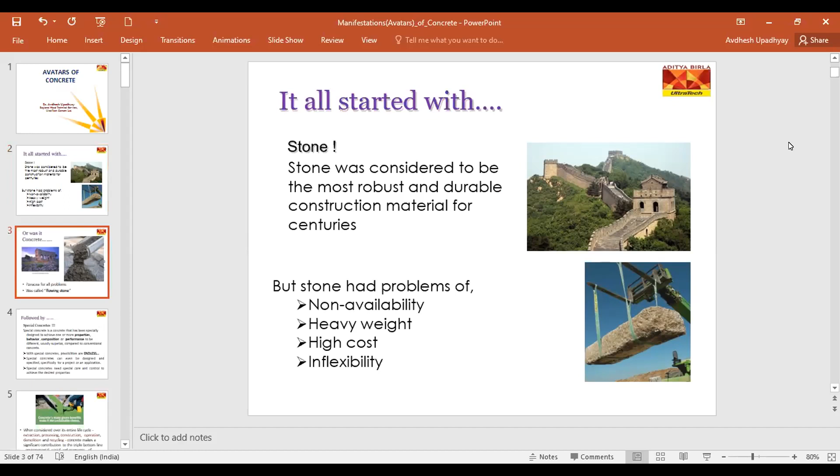So what is the panacea for all these problems? Panacea means answer to all the problems, or solution to all the problems. So the panacea for all these problems was flowing stone, and flowing stone is nothing but our concrete. So the answer to all this problem is concrete.

Today I am not discussing standard concrete or normal concrete, but I am going to discuss with you special concretes. Now the question arises, what is special concrete? Special concrete is a concrete specially designed to achieve one or more properties, behavior, composition, or performance that is different and usually superior compared to our conventional concrete or standard concrete.

And the possibilities with special concretes are endless. Nowadays, concrete is just like a menu or recipe. If somebody wants to eat Chinese, continental, or Indian, they can order accordingly. So if somebody wants special concrete like high performance concrete, high strength concrete, self-compacting concrete, or whatever, they can order as per their requirements. But special concrete can even be designed and specified project specific.

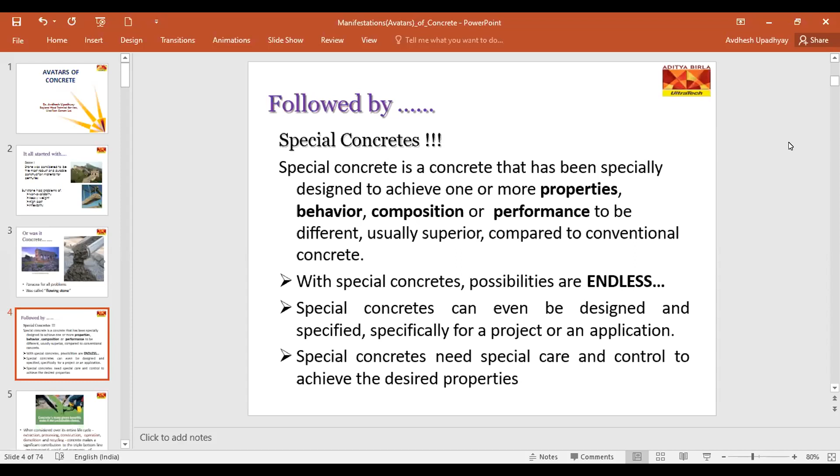Concrete's many green benefits make it a sustainable choice, when considered over its entire life cycle, starting from extraction, processing, construction, operation, demolition, and recycling. Concrete makes a significant contribution to the triple bottom line, like environment, social, and economy of sustainable development. How concrete is green, or how concrete is a sustainable material, I will explain in my next slide.

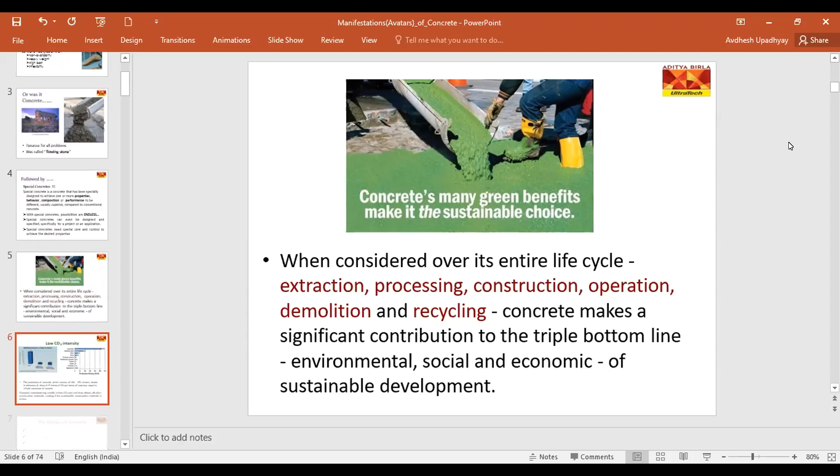If you look at this bar graph, it shows that if you produce 1 ton of aluminium, production energy required is 270 gigajoules. If you produce stainless steel, production energy required is 90 gigajoules. For steel, it's 30 gigajoules. For glass, it's 20 gigajoules. And for Portland cement, it requires 5 gigajoules per ton, whereas reinforced concrete requires only 2.5 gigajoules per ton. So concrete manufacturing results in less CO2 per unit than almost all construction materials, making it the sustainable construction material of choice. So concrete is a greener, more sustainable material compared to other construction materials.

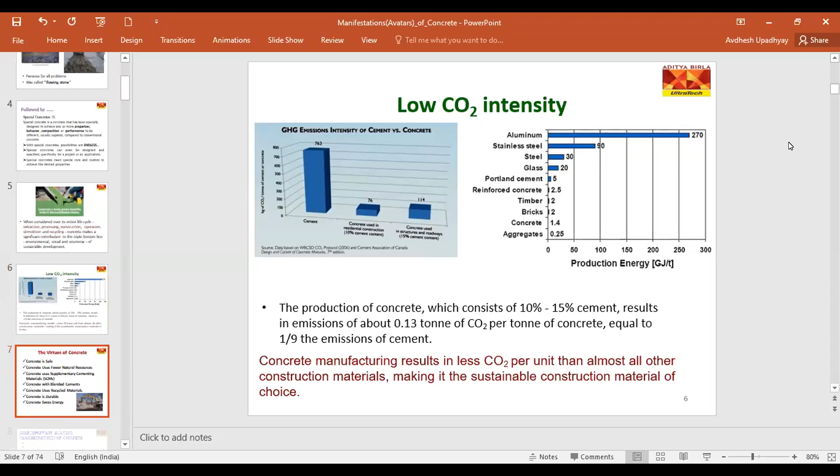So what are the benefits of concrete? Yes, concrete is safe. Concrete uses fewer natural resources. Concrete uses blended cement. Concrete uses recycled material. Concrete uses plastic waste. Concrete uses rubber waste. Concrete is durable. Concrete saves energy, and concrete saves time also.

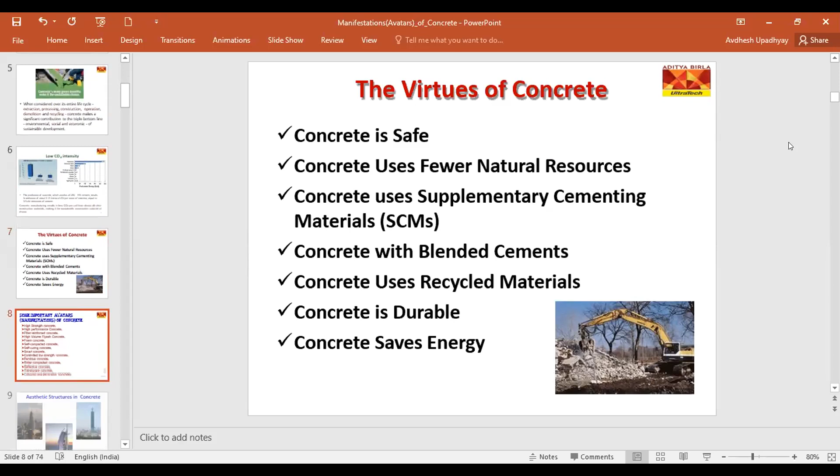So these are some avatars or manifestations of concrete: high strength concrete, high performance concrete, fiber reinforced concrete, high volume fly ash concrete, foam concrete, self-compacting concrete, self-curing concrete, smart concrete, controlled low strength concrete, pervious concrete, roller compacted concrete, reflective concrete, translucent concrete, colored concrete, and decorative concrete. I will discuss a few of them in my next slides.

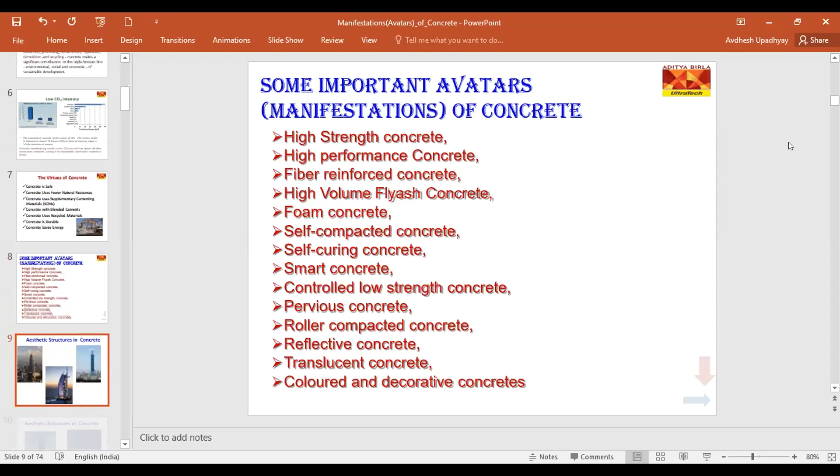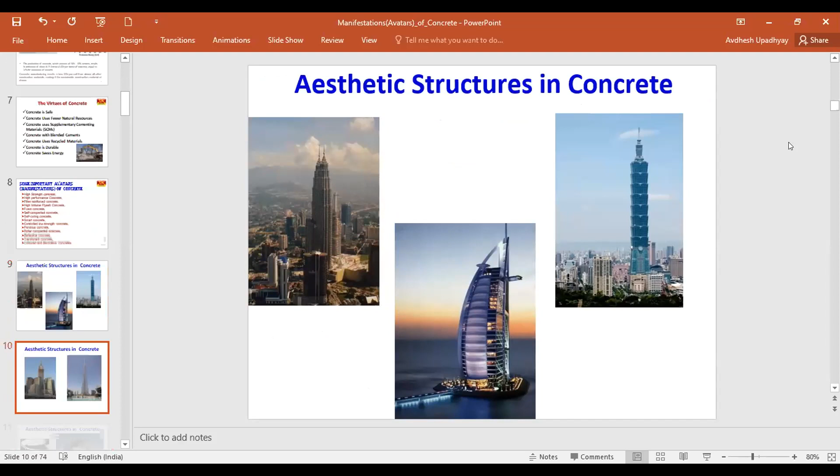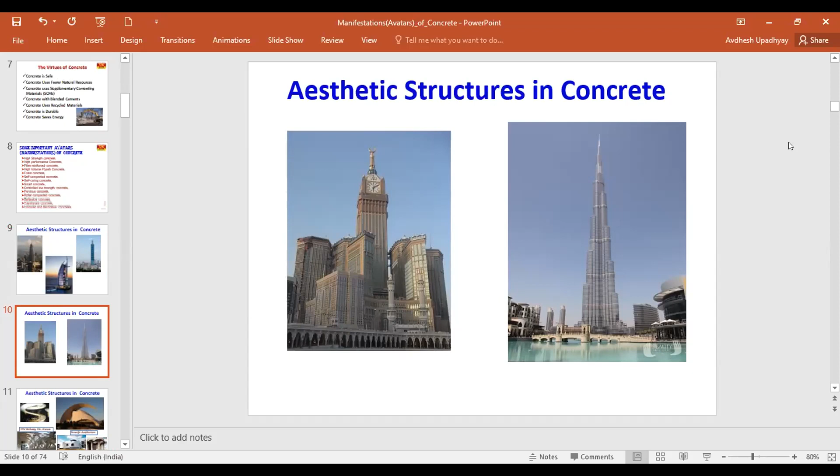This type of structure is possible only with concrete. Without concrete, construction of such type of structure is not possible. If you look at this aesthetic structure in concrete, these are a few aesthetic structures in concrete. This type of structure construction is possible in concrete because of its flexibility, durability, and moldability.

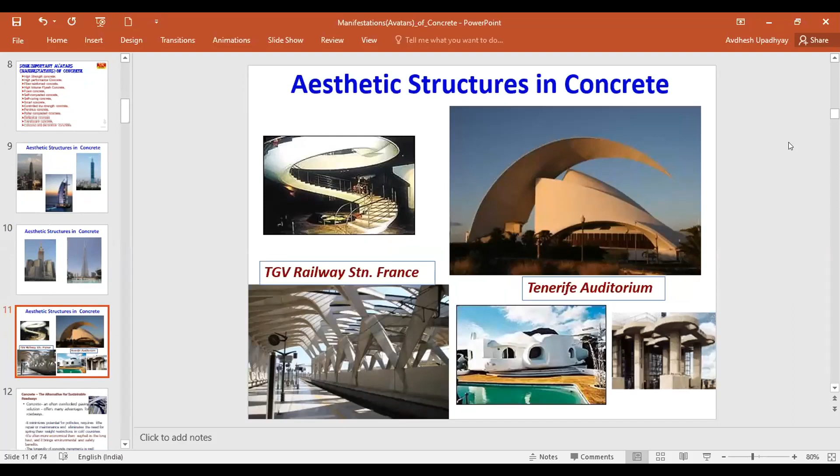Concrete is not only used in residential or commercial buildings, but it offers many advantages for roadways because it minimizes the potential for potholes, requires little maintenance, and eliminates the need for spring thaw weight restrictions in cold countries. This is not applicable in our country, but it offers more economy than asphalt in the long haul, and it brings environmental and safety benefits.

The longevity of concrete pavement is well documented. If you look at Marine Drive roads, built around 1916, then Grand Trunk Road, then Nagpur Road, all are concrete roads. They are also well documented and durable.

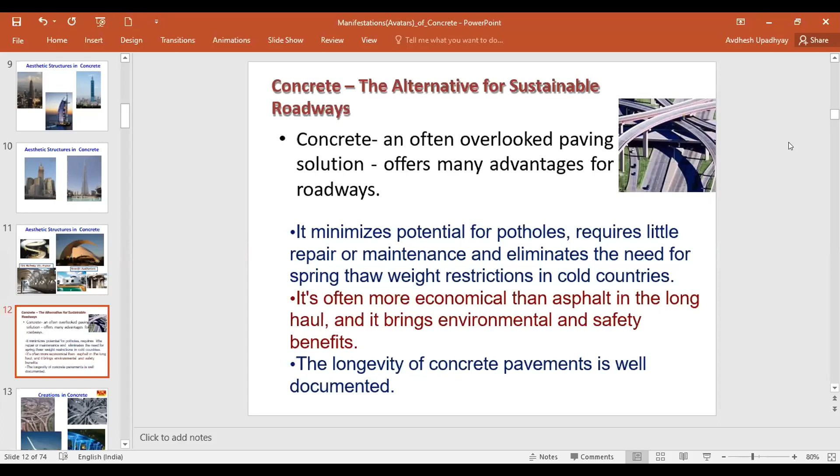These are some creations in concrete.

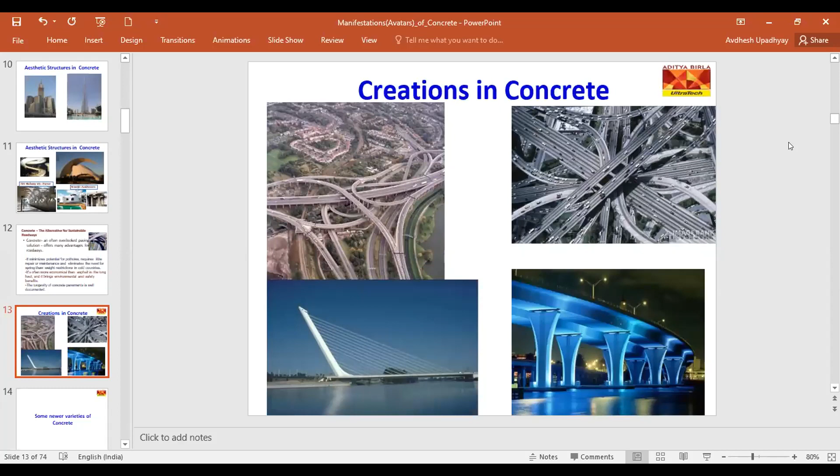Some new varieties of concrete include ultra high performance concrete, that is UHPC. UHPC is also known as reactive powder concrete. It is a high strength ductile material formulated by combining Portland cement, silica fume, quartz flour, fine silica sand, high range water reducer, water, and steel or organic fibers.

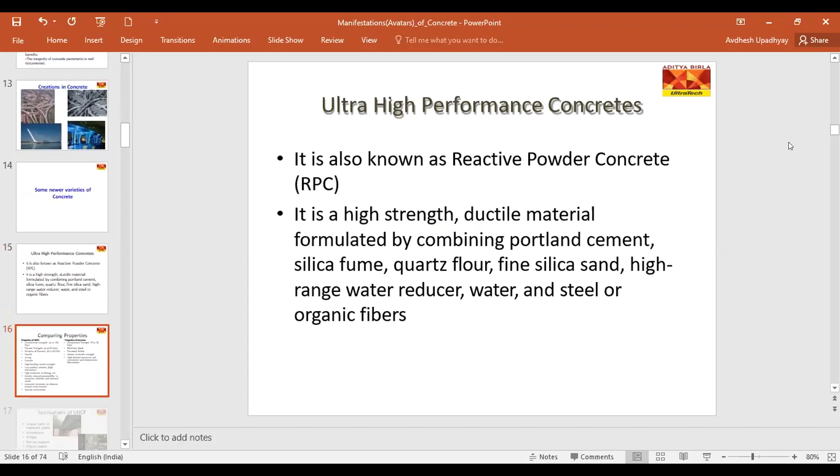What are the advantages of this high performance concrete compared to normal concrete? If you look at the compressive strength, normal concrete compressive strength is 25 to 35 MPa, whereas UHPC compressive strength is up to 200 MPa. Flexural strength is 50 MPa, whereas modulus of elasticity, that is E, is 45 to 50 GPa.

It is highly ductile, strong, durable, with high bending tensile strength, and high resistance to salt, increased resistance to abrasion, speed in construction, and it greatly reduces permeability to moisture, chloride, and chemical attack.

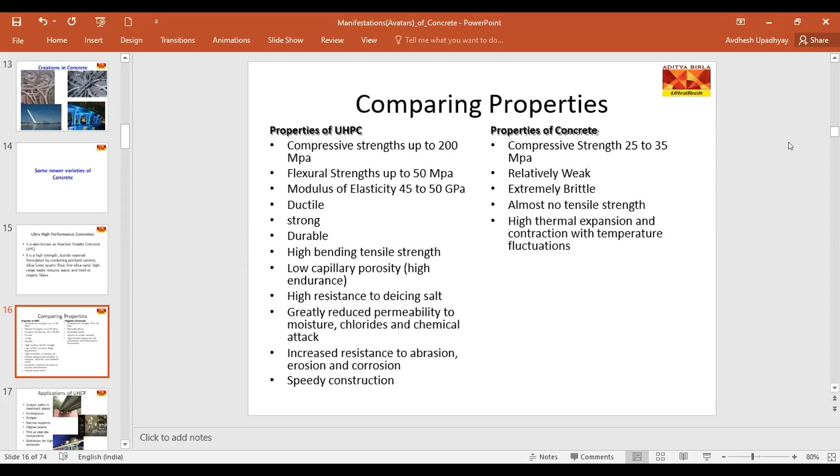These are some applications of UHPC: scraper path in treatment plants, architecture, bridges, narrow support, filigree beams, thin or slab-like components, buttress for high pressures.

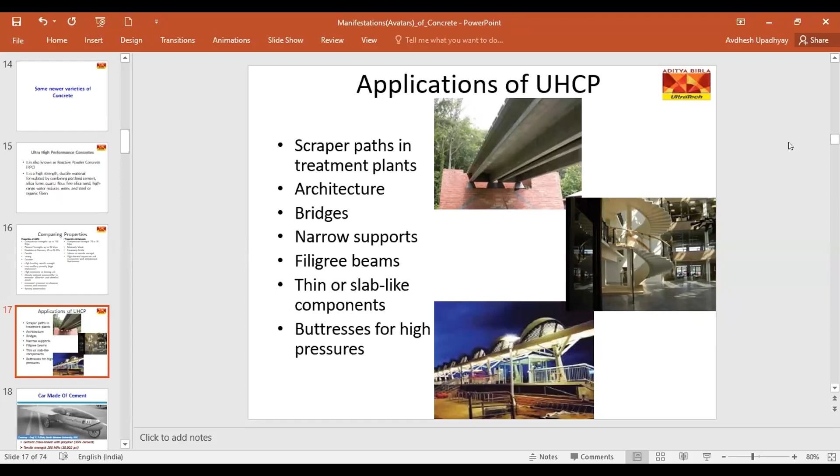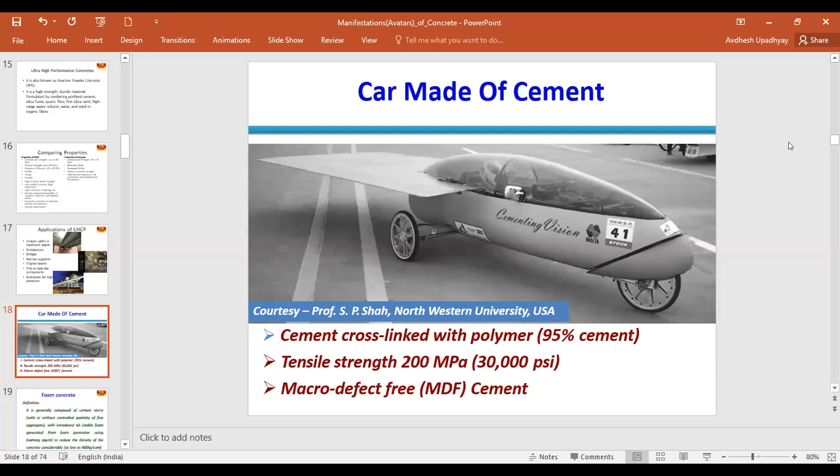Next special concrete is foam concrete. Foam concrete is generally composed of cement slurry with or without controlled quantity of fine aggregate with introduced air. It is stable foam generated using a foaming agent to reduce the density of concrete considerably, as low as 400 kg per cubic meter.

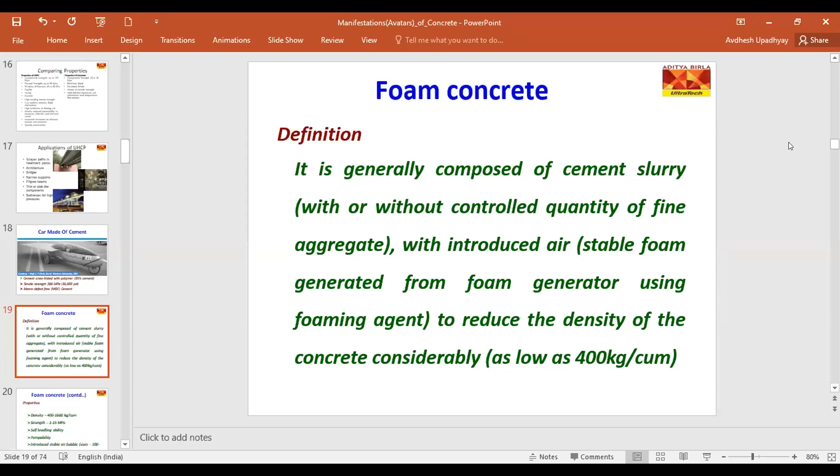These are the properties of foam concrete. Density ranges around 400 to 1600. Strength is 1 to 15 MPa, with self-leveling ability, pumpability, and introduced stable air bubbles. The size of air bubbles is 300 to 400 microns.

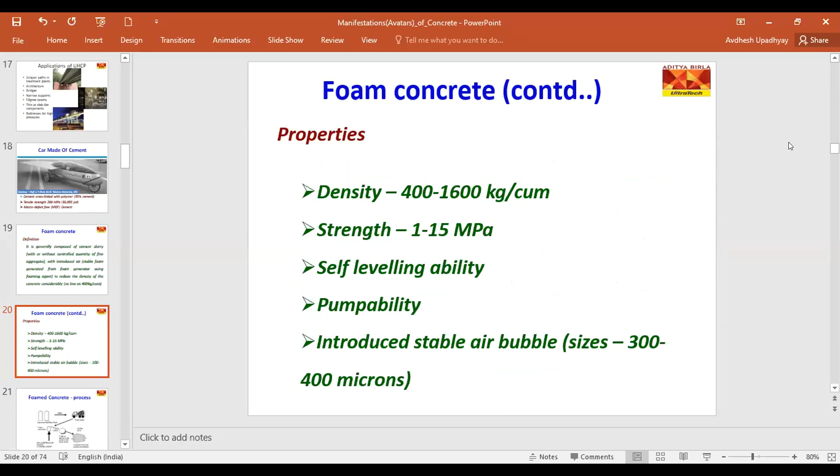These are applications of foam concrete: road sub-bases, trench filling, as heat insulating materials for roofs of residential and industrial buildings.

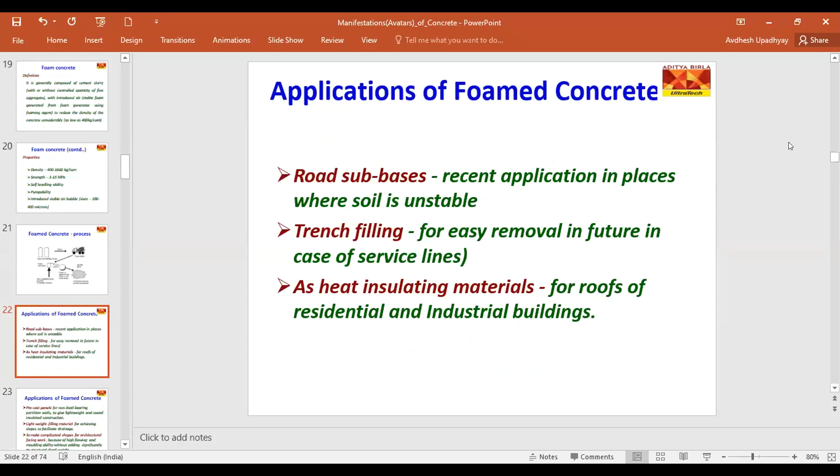These are applications of foam concrete: precast panels for non-load bearing partition walls, lightweight filling material for achieving slope to facilitate drainage, to make complicated shapes for architectural facing works because of its flowing and molding ability without adding significant structural dead load.

Sometimes people are using Koba. Instead of doing Koba, we can use this foam concrete because it is light in weight and we can give any shape to the structure and maintain the slope. This type of concrete gives excellent performance.

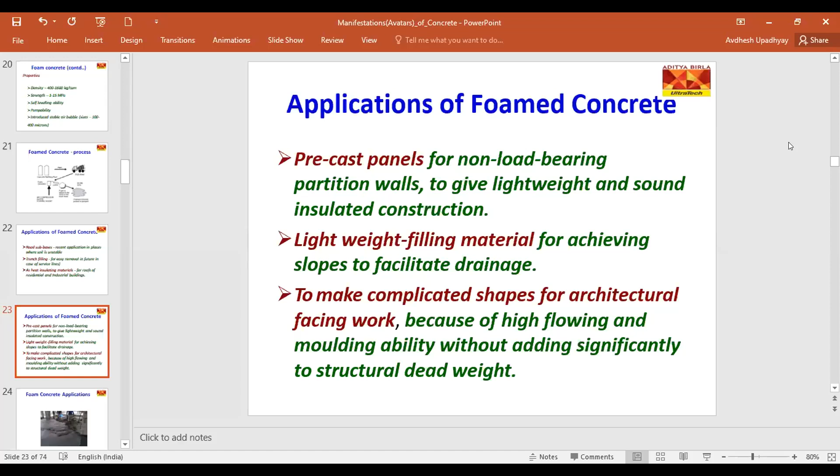These are photographs of foam concrete applications.

Next concrete is pervious concrete. Pervious concrete is also called no fine concrete, with very little fine aggregate. As per definition, pervious concrete is a concrete which is designed with closely graded aggregate and cement paste with little or no fine aggregate.

It has introduced connected pores which allow water to flow through. So the objective of this concrete is to allow water to flow through.

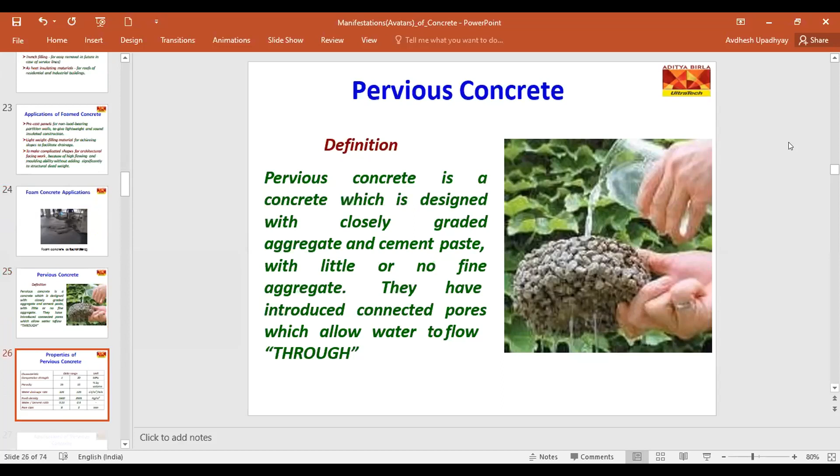These are some properties of pervious concrete. We don't want compressive strength from pervious concrete, so if you look at the range, compressive strength is 3 to 20 MPa, but we require porosity. Porosity range is from 15 to 25% by volume.

We require a water drainage rate, so it ranges from 120 to 320 liters per meter square per minute. Density is 1600 to 2000, and pore size ranges from 2 to 8 mm.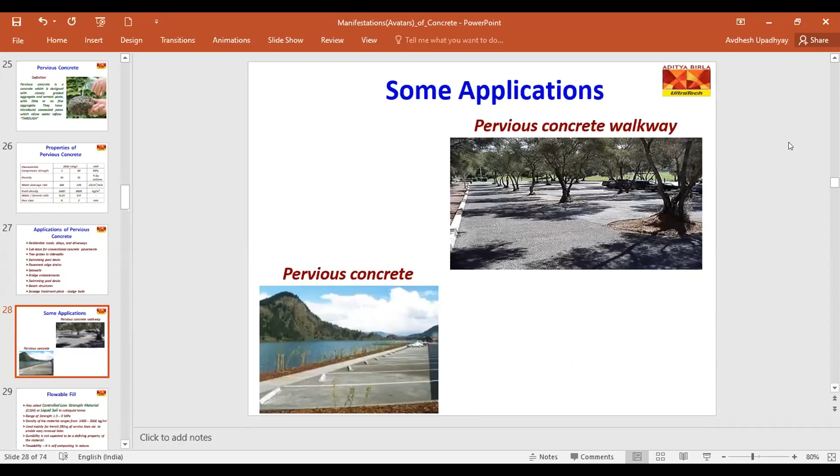Next avatar is our flowable fill. This concrete is basically controlled low strength material, or liquid soil in colloquial terms. Strength is 1.5 to 9 MPa. Density is 1400 to 2000 kg per meter cube. Mostly used in trench filling. Durability is not a criteria, but we require flowability.

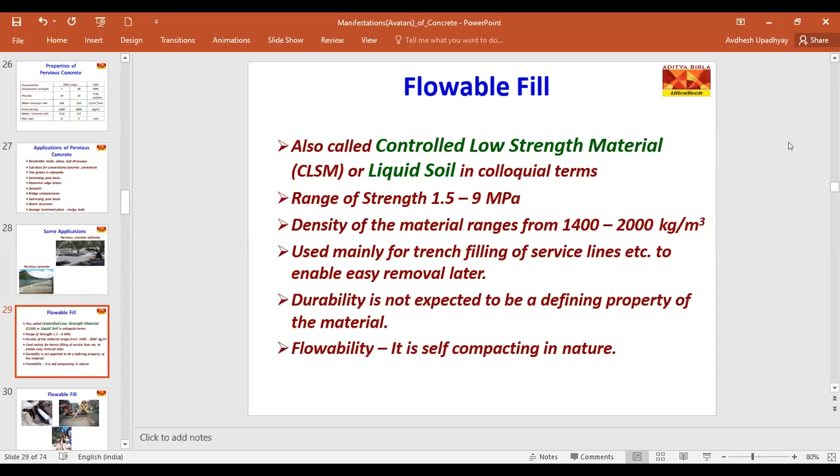It is self-compacting in nature. These are some pictures of flowable fill. It is used for trench filling.

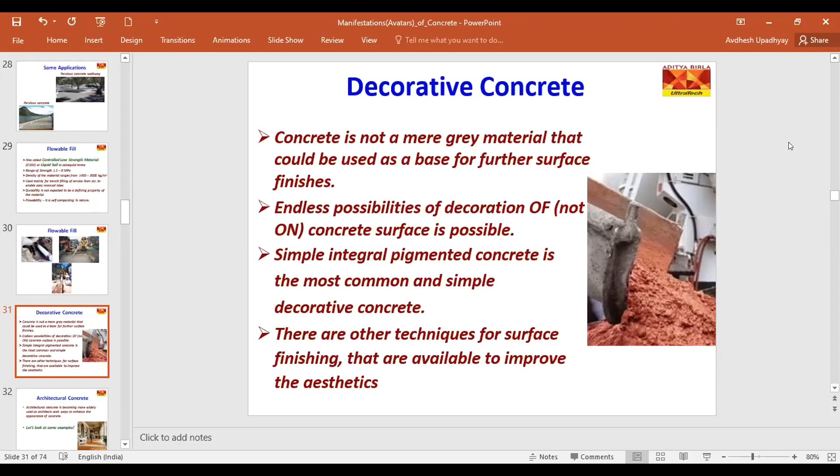This concrete is basically used for surface finishing to improve the aesthetic view. Then architectural concrete. Architectural concrete has become more widely used as architects seek ways to enhance the appearance of concrete. If you look at this photograph, these are architectural concrete. We can give any shape, shade, color, depending on the client's requirement.

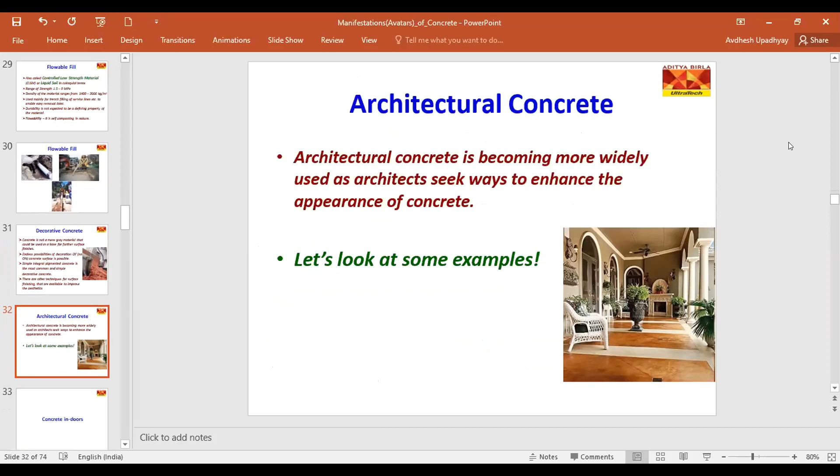Hello, sir. Concrete, now concrete in-doors.

One more concrete, that is polished concrete. Now polished concrete is fast becoming the ultimate no-wax flooring material. This is possible because of advanced equipment and techniques. Contractors are now grinding the concrete floor surface, whether new or old, to a high gloss finish that never needs wax or any coating. If you look at the photograph, you will see the high gloss finish. These are some examples of polished concrete.

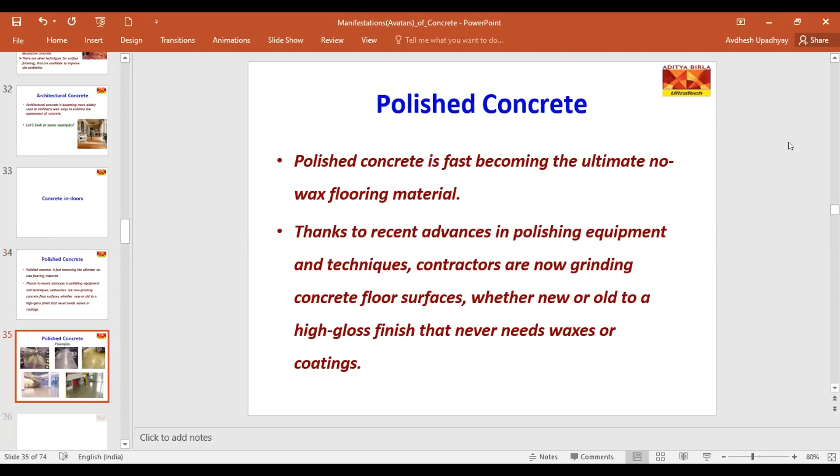So there is no need for wax, there is no need for any coating, and it reflects light, so the electricity bill is reduced because of this concrete.

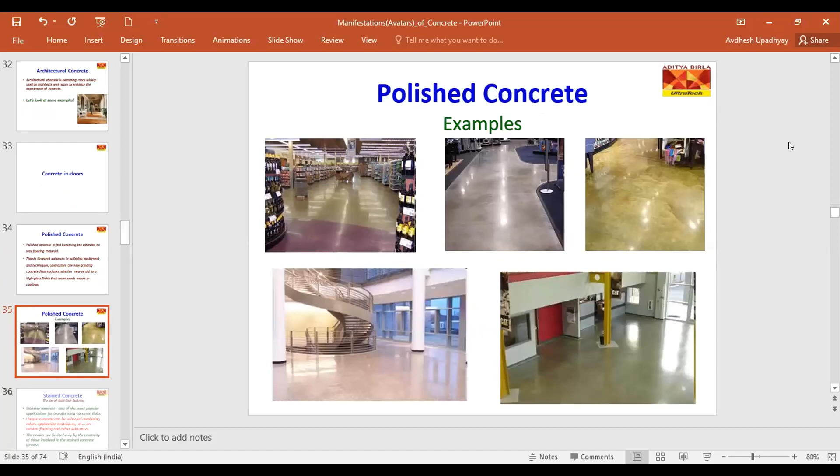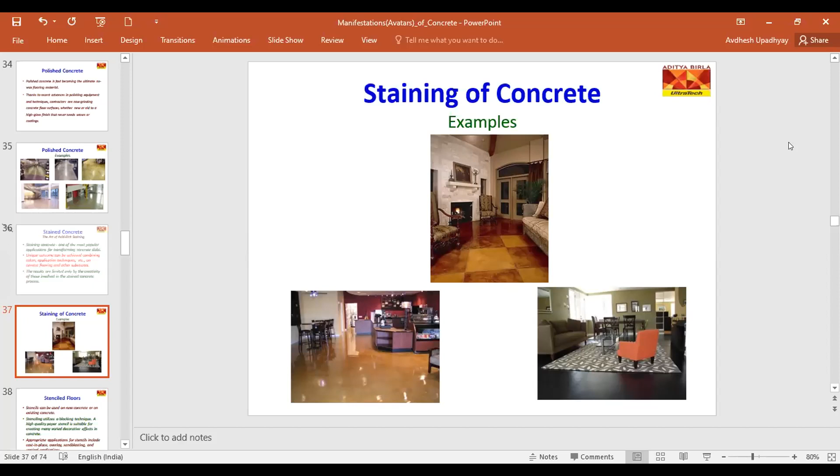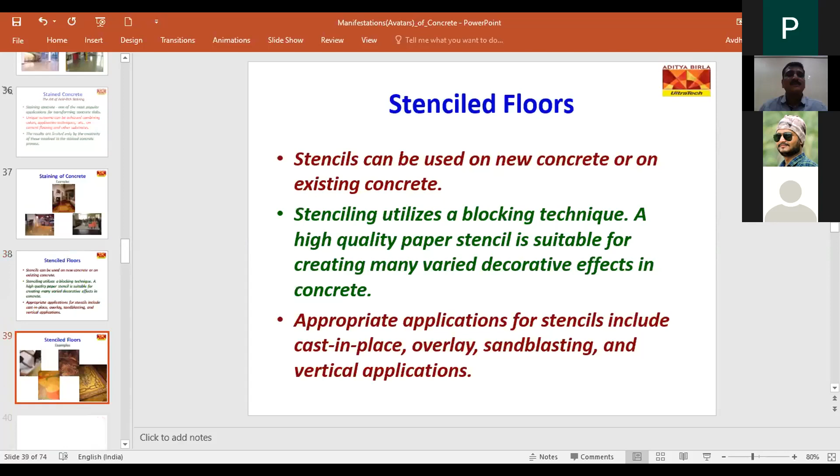These are the designs which are laid in newly laid concrete, and you can use colors, different colors, to create this concrete.

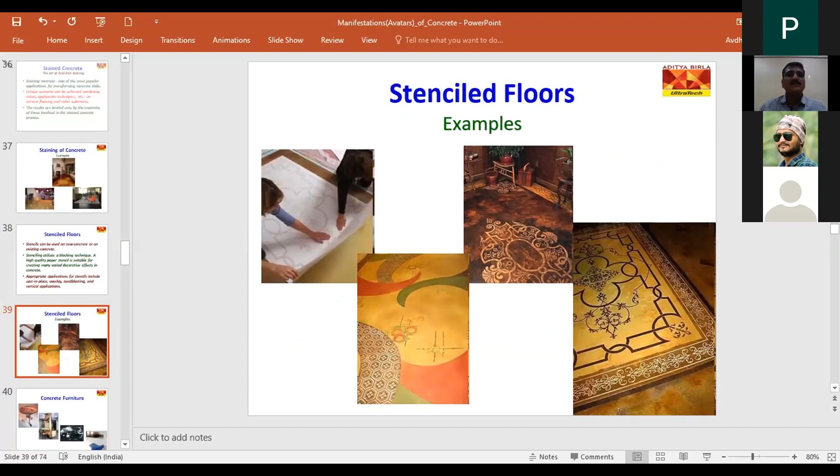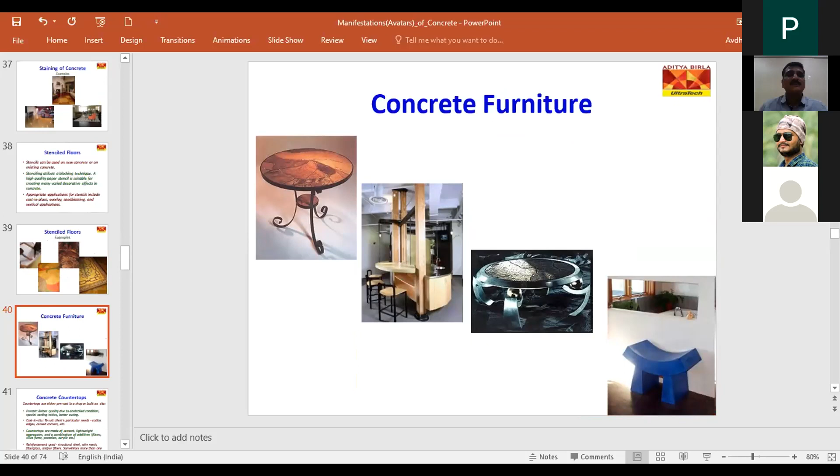Now for furniture, these are basically furniture made up of concrete. This tea table, then this cushion, then this couch, all are made up of concrete. Now the countertop is also made up of concrete. Countertops are either precast in a shop or built on site. Precast gives better quality due to controlled conditions, special casting tables and better curing; cast in situ suits the client's particular needs.

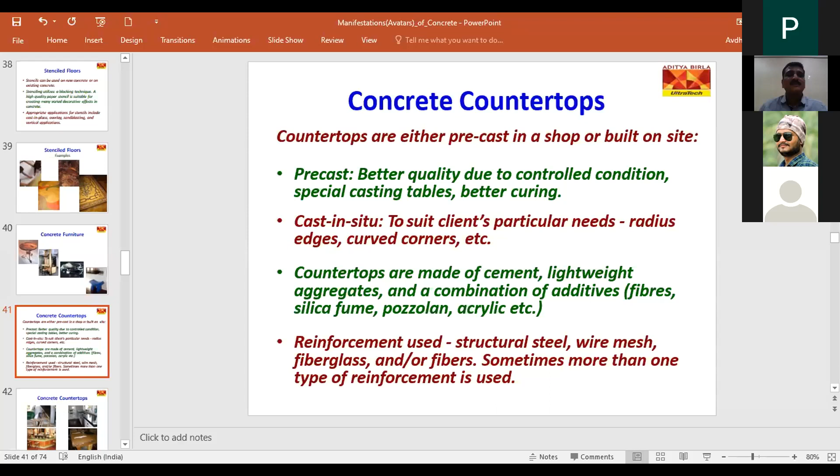If somebody wants a curved countertop, if somebody wants a different shape or size, we can adjust accordingly. So countertops are made up of cement, lightweight aggregate, and a combination of additives, that is fibers, silica fume, pozzolana, etc. These are some photographs of countertops.

In kitchen countertops, we usually use granite or marble. Nowadays granite and marble are costly, so we can replace granite and marble countertops with our concrete countertops.

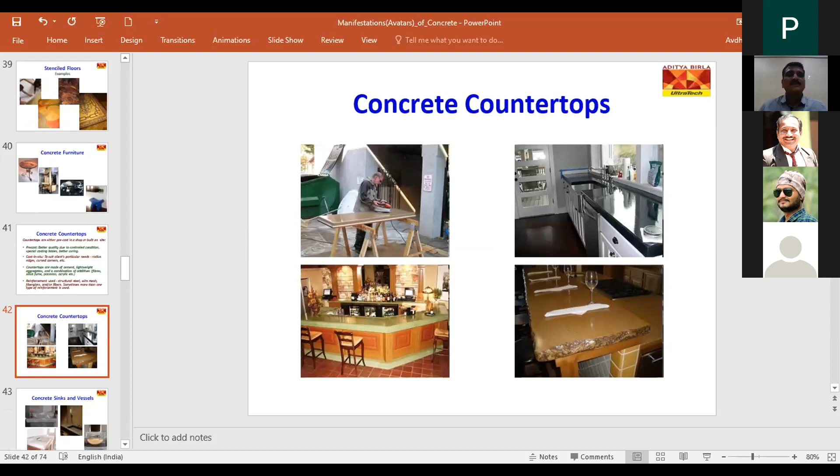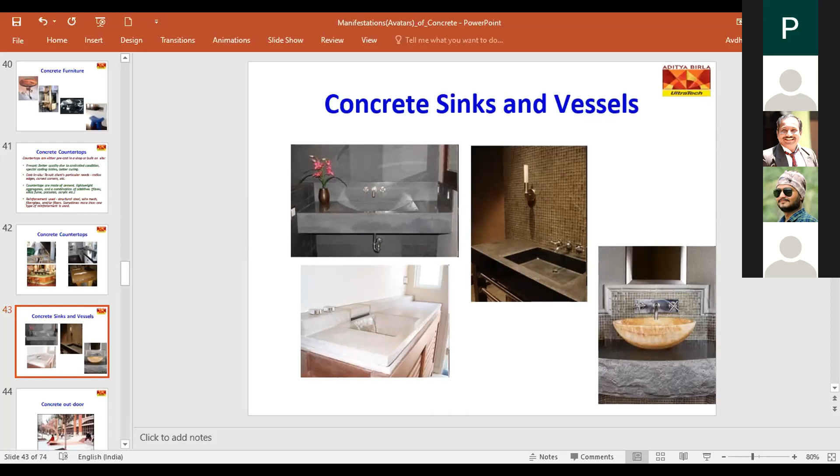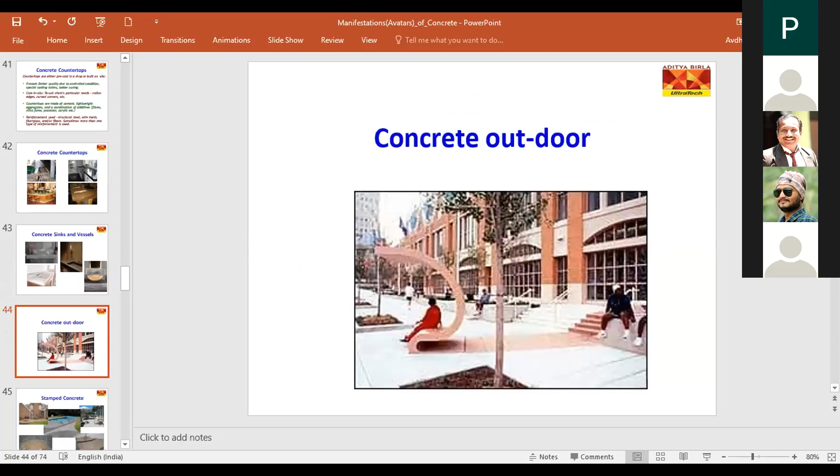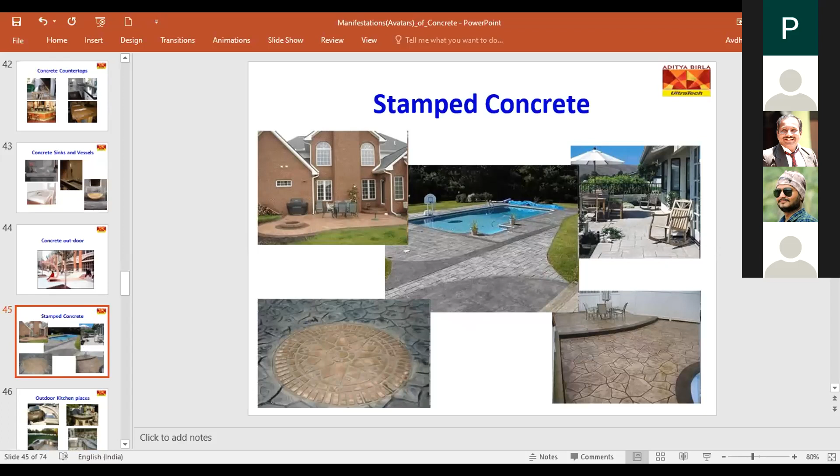Then sinks and vessels made of concrete. So everything is possible in concrete nowadays. These are concrete outdoor seating. These are stamped concrete. Stamped concrete is popular in India nowadays. At UltraTech, we also provide stamped concrete in major cities like Mumbai, Pune, Bangalore, Noida, Chennai. For outdoor kitchen places, because of moldability, flexibility, and durability, we can give any shape and size in concrete, and it requires less maintenance compared to other construction materials.

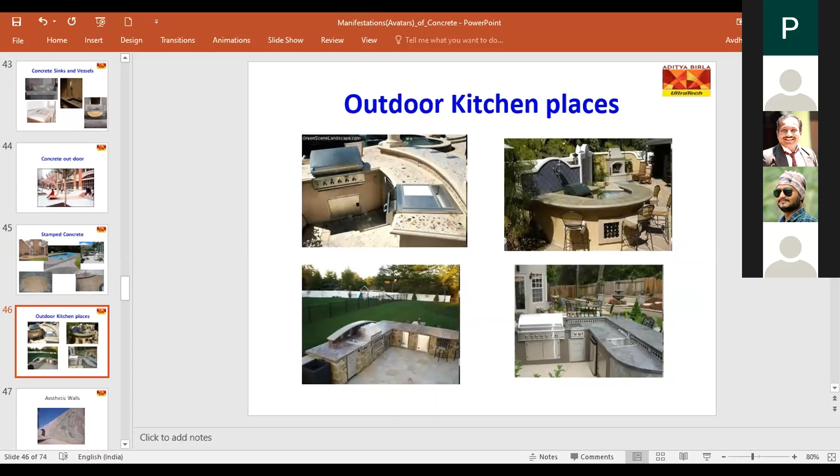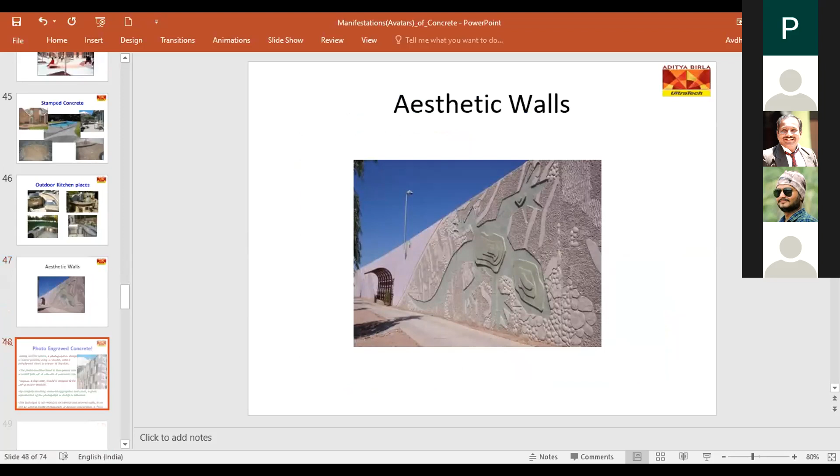This aesthetic wall is in concrete, so we can give any design. If somebody wants to engrave his or her photograph, his or her picture, then it is possible in concrete. So this is actually photo engraved concrete. You can put your photographs also. But it is not available in India. Actually, it is on a trial basis.

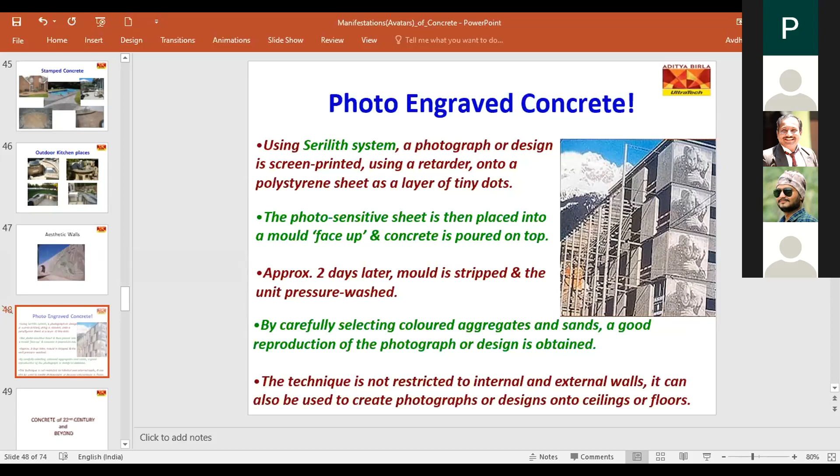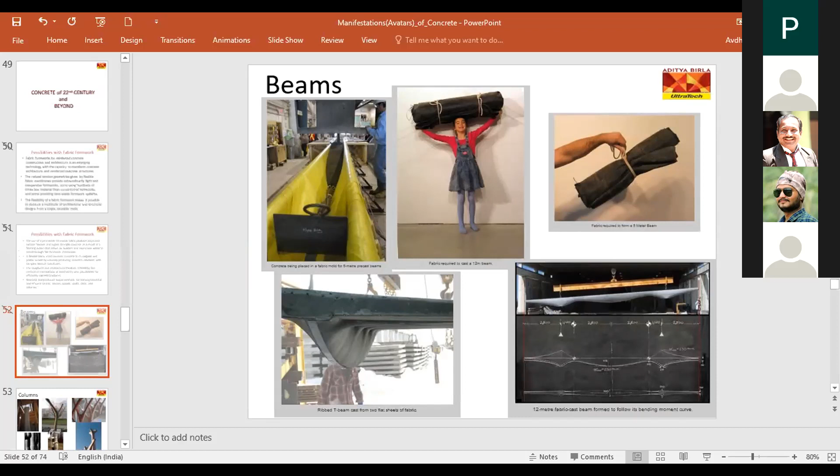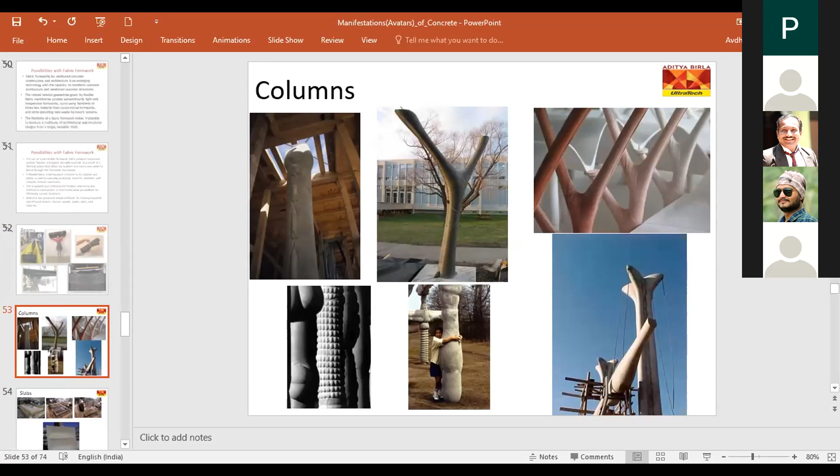So concrete of the 22nd century and beyond. These are actually ready-made concrete beams. If somebody wants a particular size and shape of beam, we can prepare it in the laboratory and give it to our customer. This designer column is also possible in concrete. These all are basically columns. Then these are ready-made slab panels.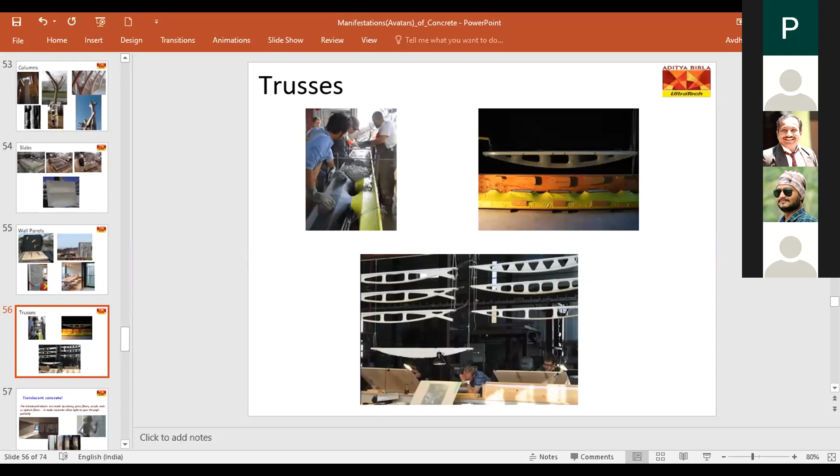Then next concrete is translucent concrete. Translucent blocks are made by mixing glass fibers, acrylic rods or optical fibers to make concrete allow light to pass through partially. So this type of translucent concrete we can use as a partition wall or in offices.

Hello, sir. Yeah. Yes, ma'am. So your voice is getting disconnected in between. I think there is poor network. Okay.

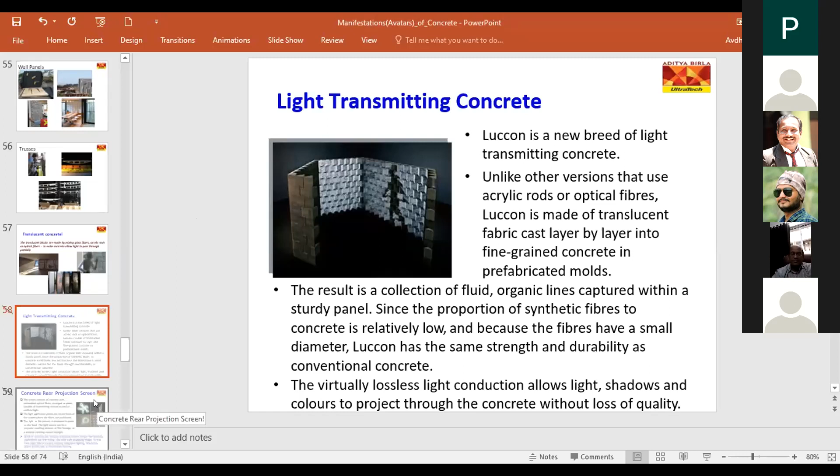This is a light transmitting concrete. This is under trial basis. So just I heard and I want to share this thing with you. This type of light transmitting concrete is also possible. Then if you want to project some part or highlight some part, it is also possible in this concrete. This concrete is called as concrete rear projection screen. It is also under trial.

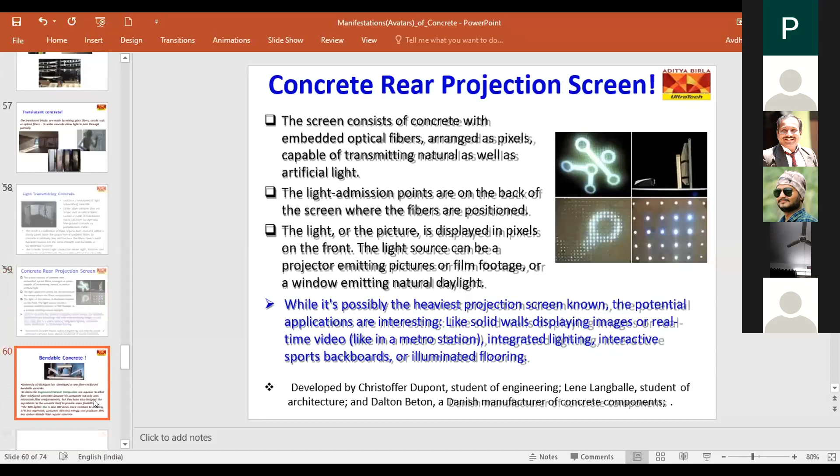Then bendable concrete. University of Michigan has developed a new fiber reinforced bendable concrete. It has many advantages, like it is 40% lighter, 500 times more resistant to crack, 37% less expensive, consumes 40% less energy and produces 39% less carbon dioxide than the regular concrete.

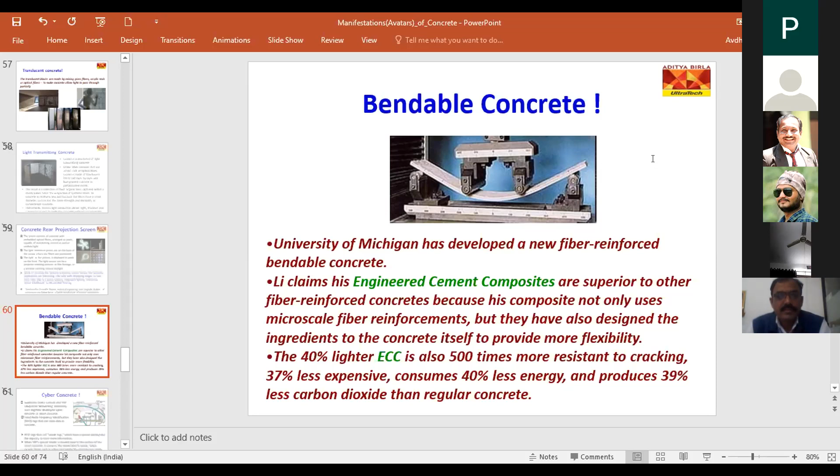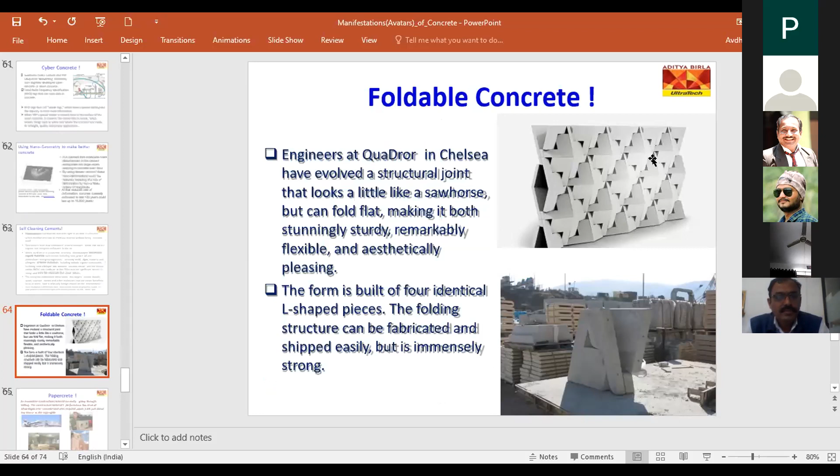So because of this bendability, we can mold or use such type of concrete for architectural purposes, or it can be used for beams and where moldability property is highly required. These are foldable concretes. It is also under a trial process. So in future, we will see such type of concrete. Then inflatable concrete.

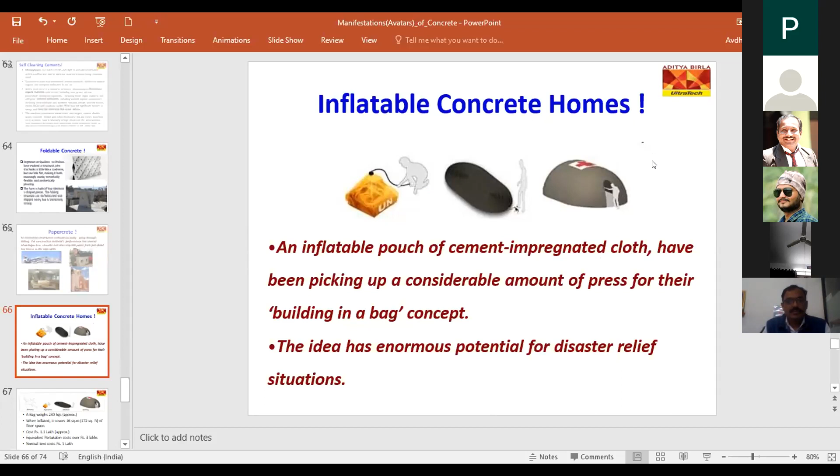This is something interesting. An inflatable pouch of cement impregnated cloth, a building in a bag concept. The idea basically is it is used in a disaster relief situation, and how it works I will explain you. This bag weighs roughly around 230 kg to 250 kg approx. When inflated, it covers 172 square feet of floor space, and its cost is roughly around 1.1 lakh to 1.2 lakh.

If you want to purchase an equivalent Portakabin, the cost is roughly around 3 to 3.5 lakhs. And if you purchase a normal tent, then the tent cost is 1 lakh rupees. And this inflated bag is waterproof, moisture-proof, fire-proof, and it is highly recommended and used especially in disaster relief situations.

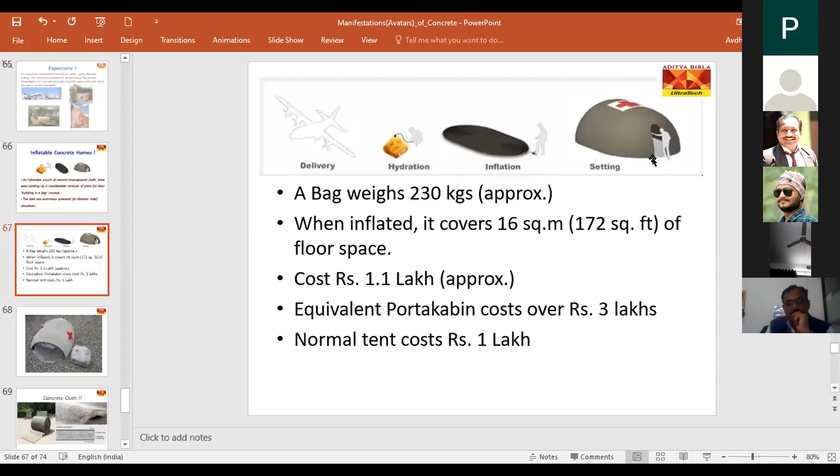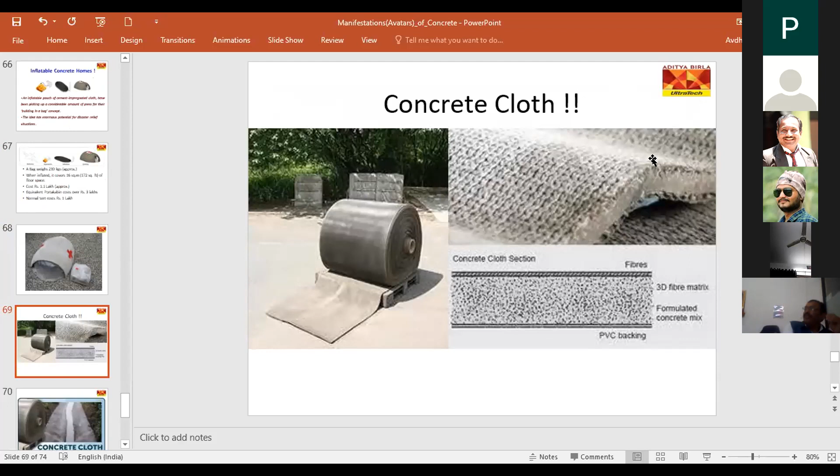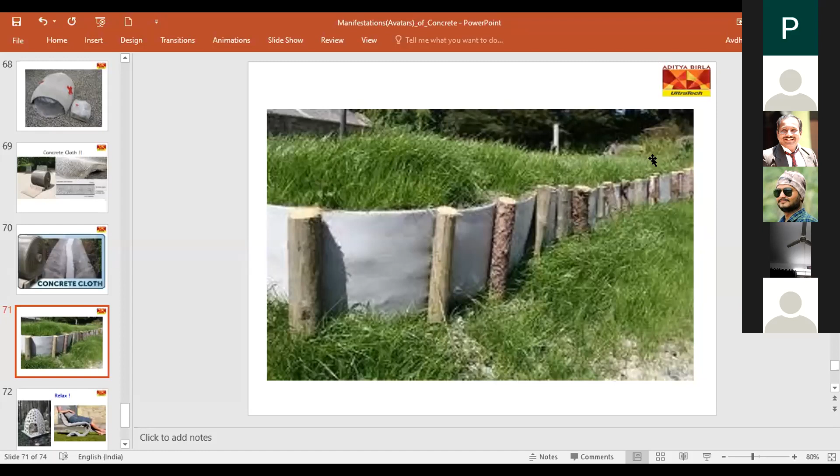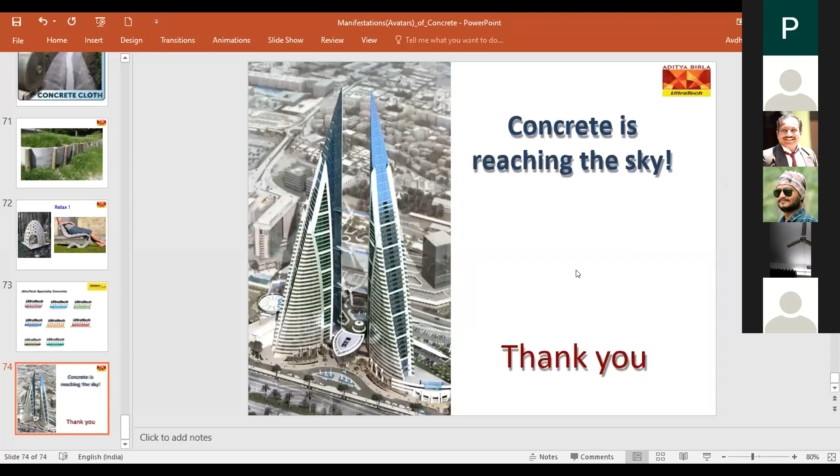Please discuss concrete furniture. Okay. As I discussed and told you, nowadays it is possible. Concrete is very flexible in nature nowadays. So we can make various types of furniture. Yes. Okay, any more questions?

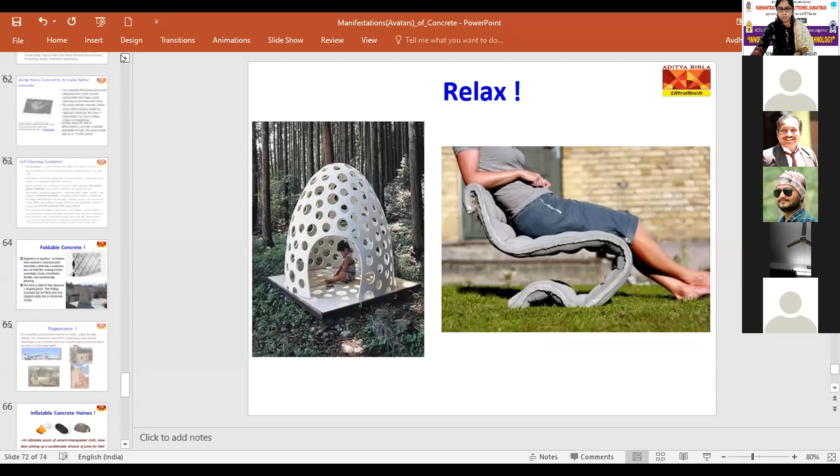Sir, one more question. Yes, ma'am. How to make reflective concrete? What is its mix design? Pardon? Reflective concrete. Okay. You are talking about this translucent concrete, sir? Yes, sir. One more slide you have shown there. This is light transmitting concrete, sir. I have shown two slides. One is translucent concrete and one is transmitting concrete. So your question is pertaining to translucent concrete.

So it is possible, sir, because in such type of concrete, coarse aggregate is minimal, and we are using glass fibers. And apart from glass fiber, acrylic rods and optical fibers. So these glass fibers, optical fibers or acrylic rods allow light to pass through and through. So we can see a person if he is standing or sitting behind that particular wall. Okay, sir. Thank you, sir.